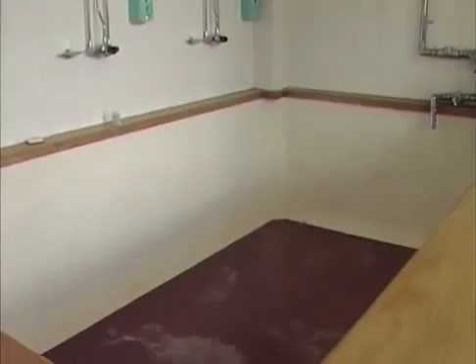So they wanted a new stadium with a greater capacity, up to 60,000, and the best corporate facilities possible. As a club, they had a reputation for doing things properly. The Highbury ground was quite an iconic football ground, and they wanted a world-class stadium. To remain one of the acknowledged top 4 in the English Premiership, a significant increase in size was required, and the club were not just looking at increased revenue from ticket sales. A larger stadium could mean increasing sales across many different revenue streams.

Well, we had a very open brief. The club hadn't really attempted anything like this before, so they weren't dictating any particular method of working or role or brief for us. We formed a steering group with about 7 or 8 of the key people, consultants and clients involved with the job from pretty much the outset in March, April of 2000. We managed that group, and that really was the springboard for how the project started.

A major issue for the board of directors was to gain acceptance from the fans for a move from a much-loved home. This would be greatly helped by keeping Arsenal in North London. Not an easy task, finding enough land to host the footprint of a massive new stadium and the associated increase in traffic to and fro.

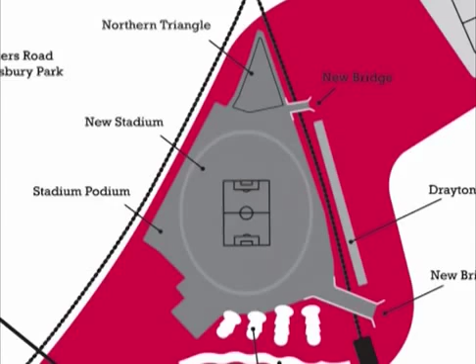Amazingly, the Arsenal directors managed to find a site only a few hundred yards from Highbury, but it was far from deserted. We very quickly realised that the project was broken into 3 fundamental parts: a new stadium, a relocation site at Lough Road where we would have to provide a lot of the facilities that were on the Ashburton Grove site, and then the final phase was Highbury Square.

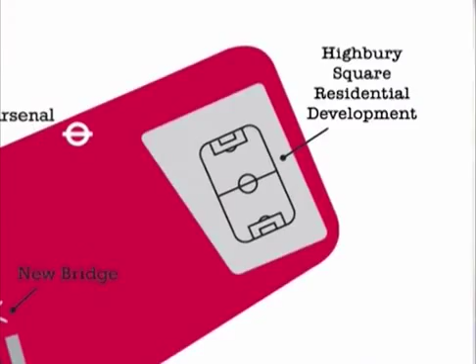Ashburton Grove is roughly a triangle. To the west and the east are mainline railway lines, and to the south a small industrial estate. In the centre lay a council-owned recycling unit, and this would need to be resited at cost to the club, as would the acquiring of the industrial units.

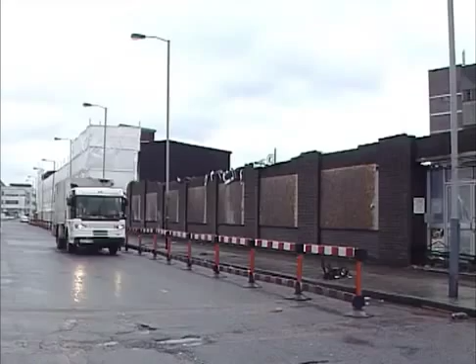And the rest of the project included the very substantial relocations of the North London Waste Authority's waste transfer station, the council's depot, their building maintenance department, and then there were a myriad of other occupiers on the site who all had to be relocated and their site purchased, or just a straight site purchase. That actually became the major focus of the first 3 years of the project.

The entirety of the site included land beyond the boundaries of the railway lines and beyond the Southern Road. Whilst this extra land could all be used, the stadium footprint would have to be within those boundaries.

A key decision was taken to appoint a builder during the design process, not always the case in such projects, and a decision which in retrospect was fundamental to the outstanding success of the project.

Well, we had a very interesting shortlisting. We started with about 6 companies who we thought might be capable of building the new stadium. Really at interview, 2 or 3 of those companies didn't really fit the bill. And then McAlpine were the most memorable, really. At interview, Rolf Christensen very much came across as somebody who wasn't in any way or shape concerned about the magnitude of the project, wasn't overwhelmed by the project, and was very confident, and even relished the deadline nature of building stadiums and having them open for the beginning of football seasons.

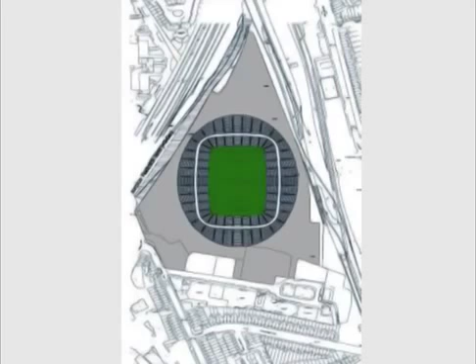An obvious but crucial design decision was choosing the distinctive shape of the stadium. A more conventional rectangular design was discounted, as it was too wasteful of much needed land, and in the end it came down to simple geometry, in that the elliptical shape fitted snugly into the triangular nature of the site, squeezing every inch from the available space.

And we were all new to it, so we all sat down and discussed every part of it, what was required, and they had traveled around at stadiums all over Europe, perhaps the world, and they had an idea what they wanted.

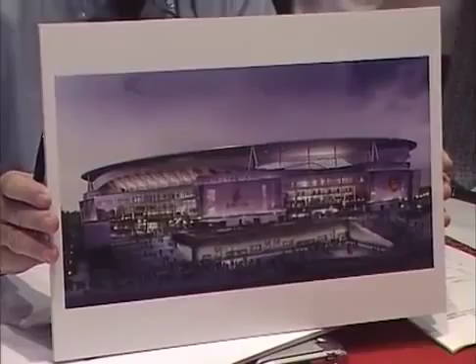We all worked very hard to get what they wanted for us onto paper and get the engineering right, and that was a real challenge. The 6 months we spent on pre-construction, without it I think we would have had a few problems, and we avoided them. The construction went like clockwork, and we completed it within time, even handing it over earlier, so it went well.

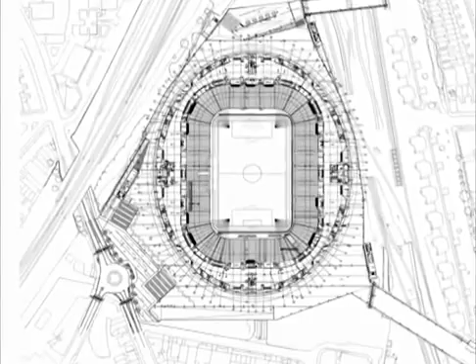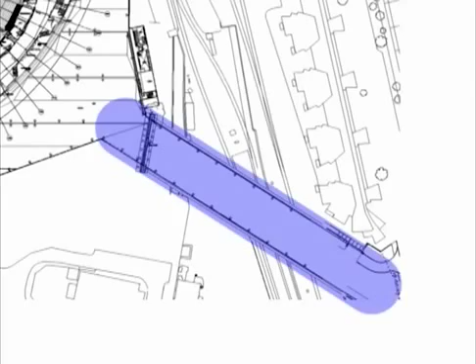To gain planning consent, the club would need to demonstrate that 60,000 fans could come and go to the ground with as little negative impact to the local community as possible, preferably using public transport. Two massive bridges were designed on the east of the site spanning the railway line, taking fans to both underground and above ground stations. Another obstacle was the recycling unit at the site's very centre.

This would have to remain in operation through the early part of the build, whilst a new unit in Lough Road was constructed. Positives to the community were needed, in addition to a new recycling unit, and it was determined that the stadium would generate much more than simply a new football ground. Areas within the site would contain affordable housing and give companies on the industrial estate the chance of resettling into new premises.

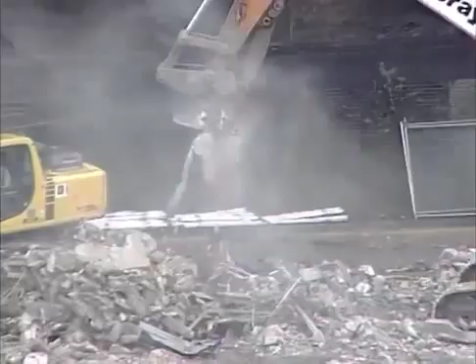What was known at this stage as simply Ashburton Grove would be a much needed and major regeneration of the area. With designs finalised and consents gained, some 2,500 signed documents later saw demolition teams move into Ashburton Grove in February 2003, and McAlpine's site teams settling into their new offices. Again, having designers, engineers and management on site was an important ingredient in the project's success.

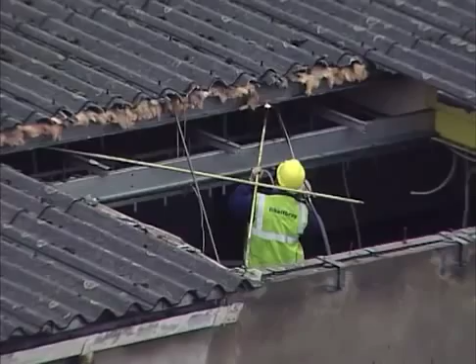Just as things were starting to happen, it all ground to a halt. It was about the end of March 2003. We'd been through, without doubt, the toughest year on the project, going through all the contract negotiations with McAlpine and the funding with the banks. We finally had virtually every one of our ducks in a row.

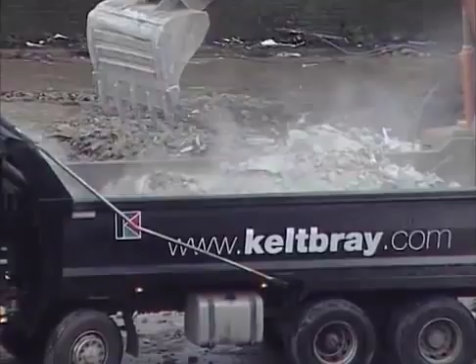Both myself and the client separately went off on holiday at the end of March. When I got back a week or so later, I went in to see him, and he gently dropped the bombshell that one of the banks had pulled out and that the funding wasn't now possible for the stadium. Work stopped and the site was mothballed, though Sir Robert McAlpine used this pause in construction to continue design development and progress the Lough Road Waste and Recycling Centre.

Today is an historic day in the life of Arsenal Football Club. I'm delighted to be able to announce that the funding has been secured for our new stadium project.

By the time the funding came in, that was 4 years on the project, and I think everyone had put so much into it by then that the thought of it not proceeding was awful. So there were some pretty major celebrations at the end of February when the banks finally signed up.

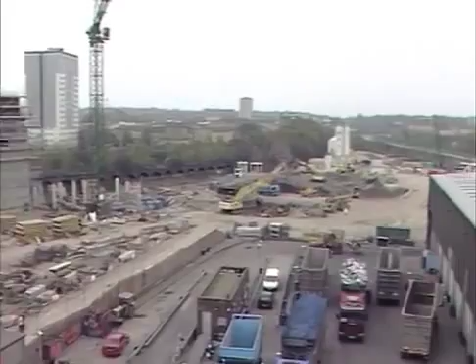With the funding now in place, McAlpines resumed work immediately and with some haste. If milestones along the critical path were not met at this early stage, it might have significant impact later in the project. Railway possessions and such like had been booked well before the hiccup in the funding. If the Arsenal board hadn't funded the continued fabrication of the bridge components, and if it wasn't for the speed in which McAlpines resumed construction, there could well have been delays.

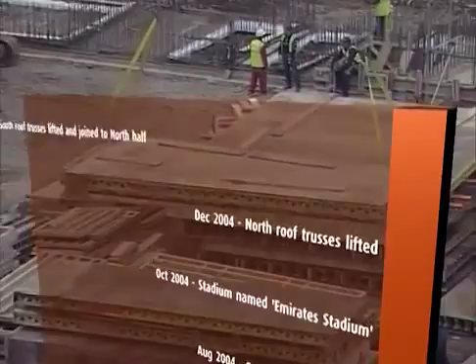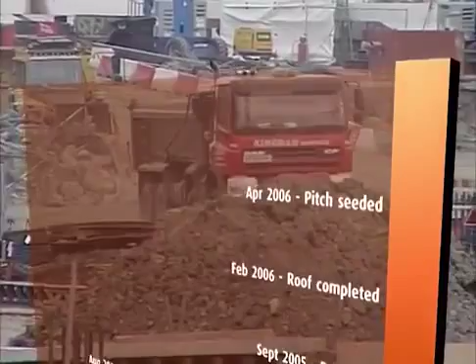Within a matter of weeks, the stadium started to take shape, and the practicalities of the construction programming became evident, with one end of the stadium apparently racing ahead. Of course, this was far from the case. Crucially, the bridge's construction had to be on time. Their assembly site actually fell into the path of the stadium, so they needed to be built and moved into place so as not to delay construction to the south end of the stadium.

Because of the constrained nature of the site, the construction programme was to commence the northern parts of the stadium first, leaving space for the bridge construction and the continued use of the recycling unit, afterwards programming the construction of the lower terracing in the south stand to create enough space for the roof truss assembly. Any delay to either the bridges or the roof would delay the fundamental stadium structure.

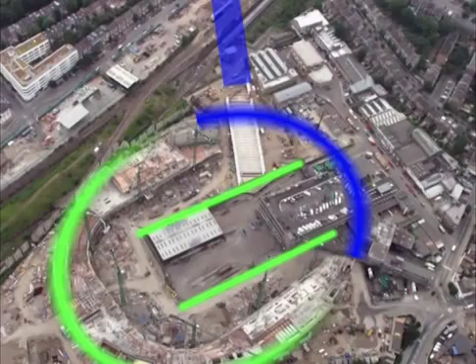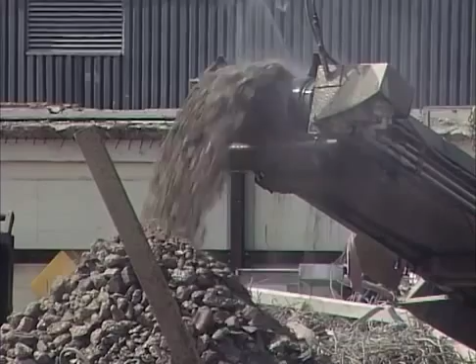We were knocking the buildings down as they were being vacated, or in the first instance having the services isolated. Building vacated, demolish, remediation and then piling, and subsequently following on as closely as we could behind the piling with the substructure. So you have a fine balance all the time in terms of trying to do one operation as close as you can to the next without losing efficiency in one or other of the operations.

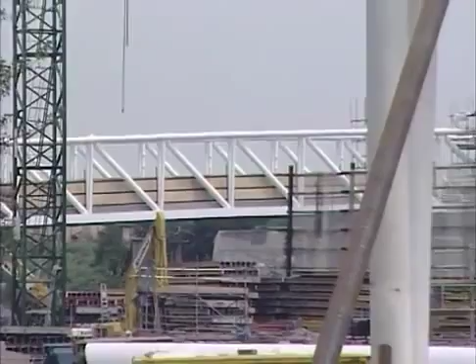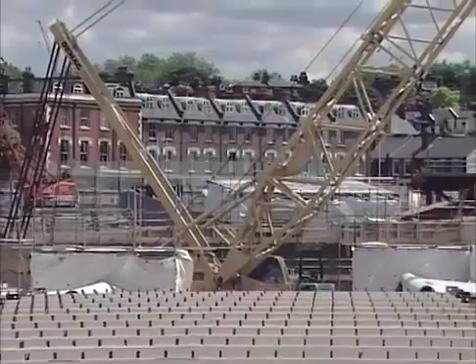Because of the unusual nature of the site, roughly a triangle surrounded by railway lines on two sides, one of the key aspects of the design were for two bridges to be constructed on the northeast and southeast of the site. To get the crowd away, we built two bridges across the railway line, and they are massive bridges. One is 26 metres wide and the other is 18 metres wide. It is two massive bridges just to take the crowd and spread the crowd.

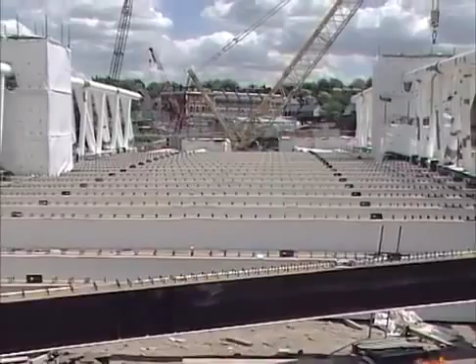There had been a few disasters with football stadiums and crowds, and all this was taken into consideration in the design, so people can escape all over the place. Because the stadium structure would fill a huge percentage of the total site available, elements of these bridges would need to be built and completed before the stadium structure was in place.

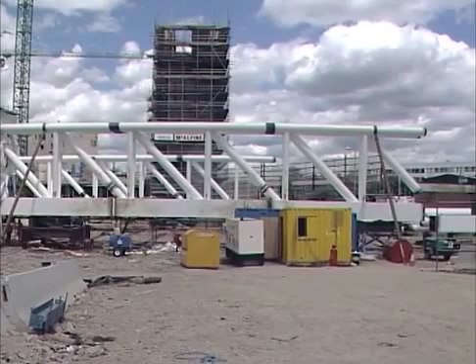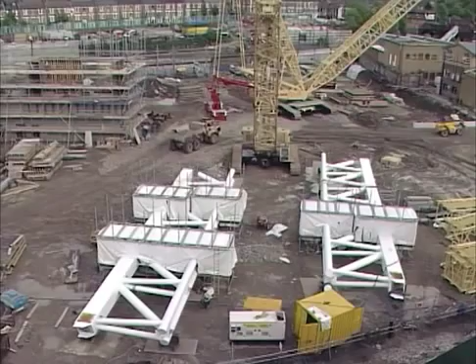The other intricacy with the site was the extent of the works we had to build that weren't necessarily related to the arena. The two bridges are good examples of this - they were assembled in the plan of the stadium and thereby occupied space that we needed to free up to build the stands.

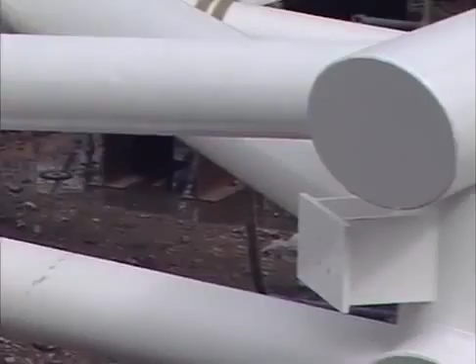The South Bridge in particular sat in the middle of the southwest of the stadium and was built as a whole 100-metre section bridge and then slid across. Until that bridge was located over the railway line and slid into place, that section of the stadium couldn't be built. The same went for the North Bridge up in the northeast corner, whereby elements were built on the site of the stadium and needed to be positioned, with dependency on getting rail track possessions to install the bridge.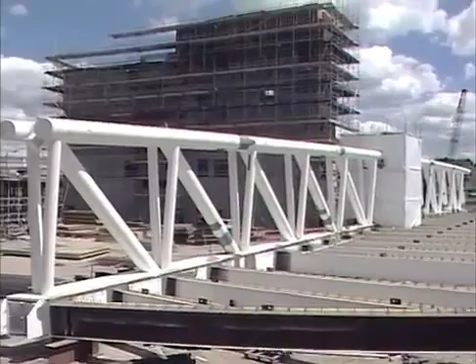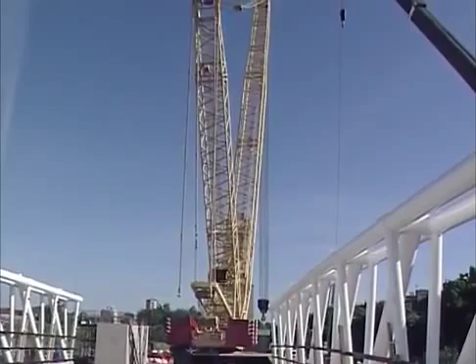So there were quite high levels of risk in terms of third-party approvals, and the consequence of not getting the bridge in place was a critical path delay in the stadium. The North Bridge was the first to be completed and was built on site from pre-produced sections. The construction team always knew that their positioning on time would be critical to the completion date, and when the funding hiccup in 2003 took place, the good relationship between constructor and client proved crucial.

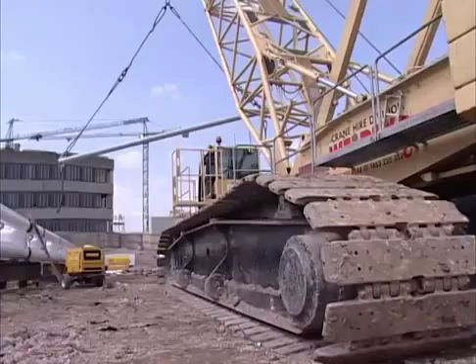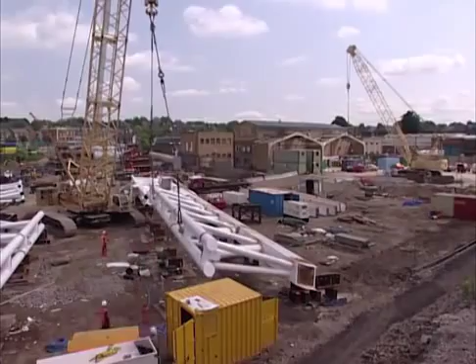We booked that possession 38 weeks prior with Railtrack, so that weekend it had to be ready. To give an example of how committed Arsenal were - that was on the critical path, and then construction was stopped in April 2003 because they didn't get the funding, and it was a long lead-in for material. Arsenal, with their own money, funded the procurement, all the material, the steel, and also the fabrication.

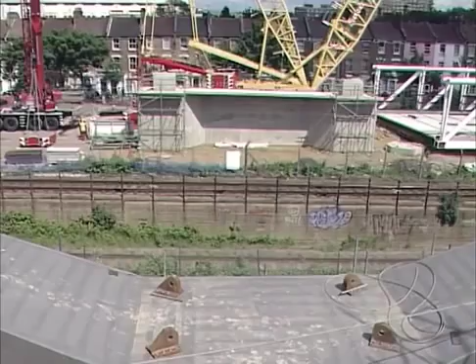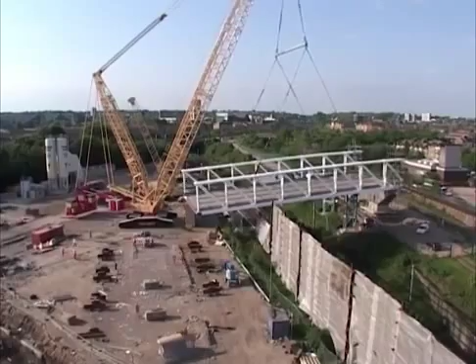So when they got the funding on the 1st of April, we were ready to go, and we managed to get it across in, I don't know, 16 hours, 15 hours, in the middle of August. That was critical because we couldn't construct the east stand without it. It was an achievement, everybody pulled together, and it worked out great. With roads and railway lines closed, the North Bridge was ready to be lifted. Built in two halves of 180 tonnes each, each section was eased into place by massive 750-tonne cranes over two weekend possessions. The second, the South Bridge, was a different animal.

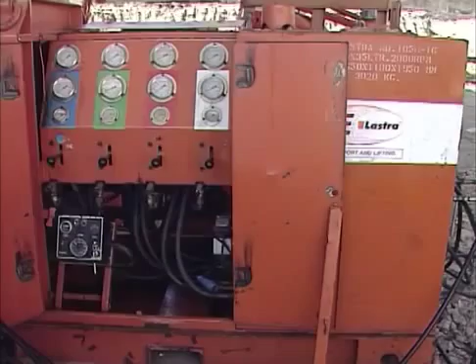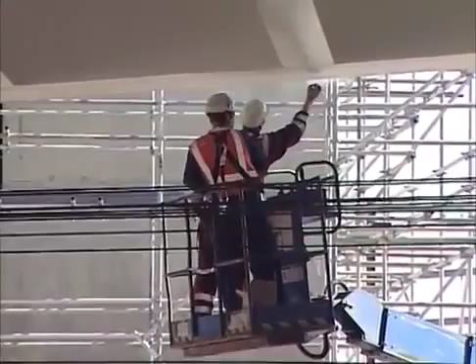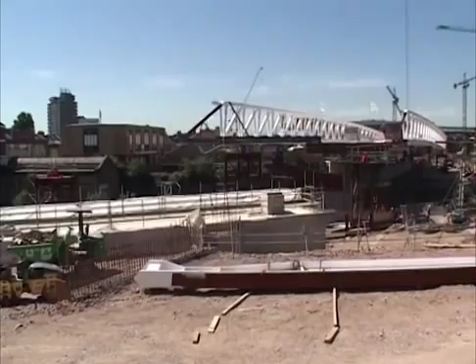It is 100 metres long and weighed 1,000 tonnes, and we basically couldn't get a big enough crane to lift it across. So we had to build it inside the stadium, inside the east stand, and then slide it across. A Dutch specialist contractor oversaw this amazing technical operation. A heavily greased 1,000-tonne bridge was gently but steadily dragged across Drayton Park Station with amazing precision. The bridge's completion and its moving away from the actual stadium structure allowed the southeastern section of the stadium to be commenced, and a major milestone on the critical path was completed on time.

With the bridges in place and away from the stadium area, attention turned to the closing of the recycling unit. Away from the glare of publicity that Ashburton Grove was creating, across town in Lough Road, the landscape had changed, and the new recycling unit was completed and opened. Built in isolation, this would have been considered a major project in any local community, and was a tangible sign to the local population of the benefits the new stadium would bring.

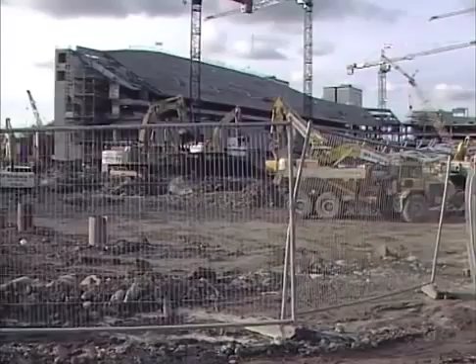Now that demolition of the waste unit could commence, work could begin on the two southernmost cores, and the area that would become a world-class football pitch could be cleared and levelled.

On the 5th of October 2004, the Arsenal directors made another important announcement. Construction of our new stadium has progressed at a fantastic rate, thanks to the great work by our stadium constructors, Sir Robert McAlpine. With the opening of our stadium in summer 2006 quickly approaching, we're delighted today to be announcing a significant partnership which will lead us into this new chapter in the history of Arsenal. This relationship is for both a naming rights partner for the new stadium and also a club sponsorship agreement, representing the biggest ever financial sponsorship deal in English football. So it is my honour to announce the beginning of the partnership between Arsenal Football Club and Emirates.

Ashburton Grove was now to be known as the Emirates Stadium. A major sponsorship deal had been signed, and any financial worries for the board started to seem a lifetime away.

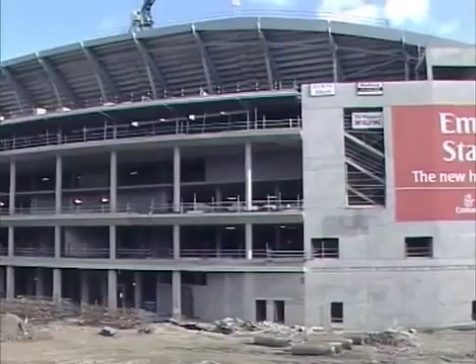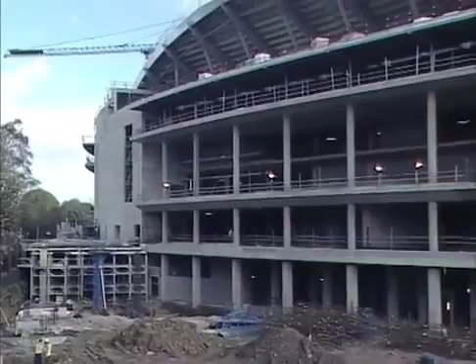The other aspect of the stadium is that on the 7 hectare footprint, the stadium covered the whole area - there was no spare land left at all. And you consider there are 600, 700, or 800 car parking spaces below, which helps everybody. It's quite unusual that within a stadium you have the parking facilities. The stadium has a raised podium, so everything at ground level is either car parking, changing rooms, kitchen, storeroom, and maintenance room. But all that had to be squeezed into the footprint on this triangle we had at the stadium.

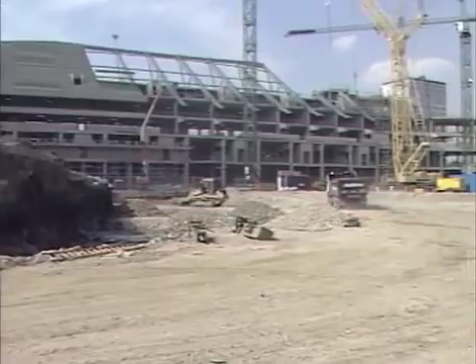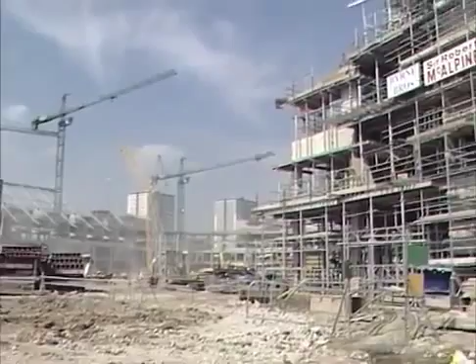The northern end of the stadium raced on ahead of the southern end, until both bridges and recycling units had moved. Then the southern cores could be built, but leaving out the southern prefabricated terracing units to allow space for the roof trusses to be swung into position. Only once the roof trusses were in position could the full stadium continue on to completion.

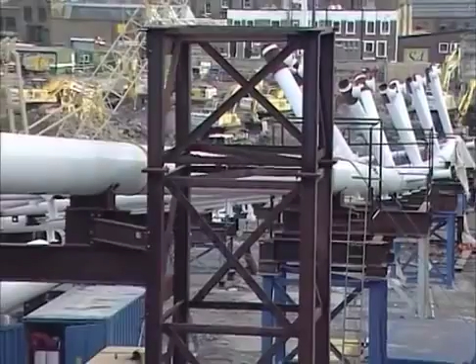The roof trusses had to be built in the same way as the bridges. Prefabricated components were shipped onto site, joined together in the future pitch area, and then hoisted into position and bolted together. The roof was a real challenge.

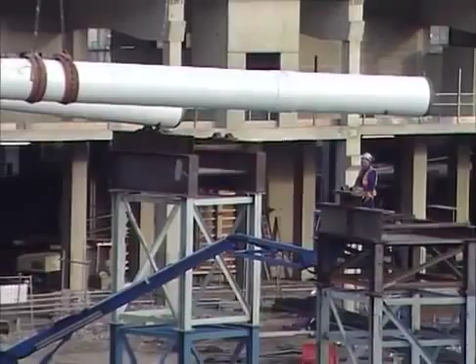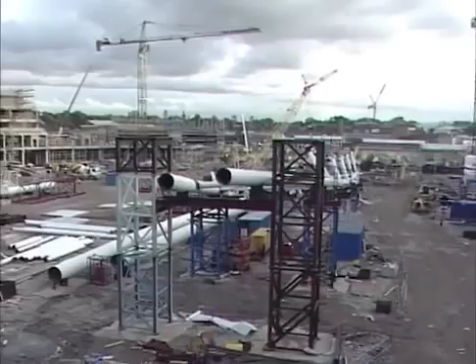Historically, stadiums have had problems with the roof. We spent a lot of time together with Watson - their engineering is very, very good, and they are tubular specialists, and we have used them previously. We also spent a lot of time with the structural engineer, Buro Happold. We went through how we were going to fabricate it and how we were going to erect it, and we simplified it. It was decided originally we were going to lift it in one piece - this 220 meter long steel truss, 800 tons - but then we decided to lift it in two and prop it.

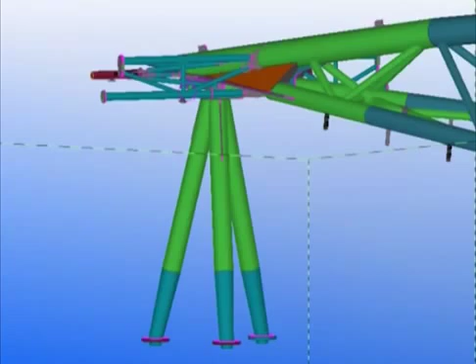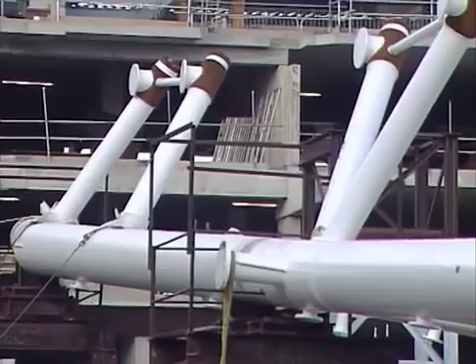With this X model design they used, that meant every piece of steel went up fitted - it didn't have to be taken down or remade. This X model in the design was definitely a huge help for us, and it worked out well. We were able to erect the roof steelwork in 6 months, including all secondary steel. We fitted the secondary steelwork at site level, so it went up already fitted, which reduced the program and also reduced the health and safety risk for people working up in the air. It was all bolted together - there was no welding up at the top - and it went well.

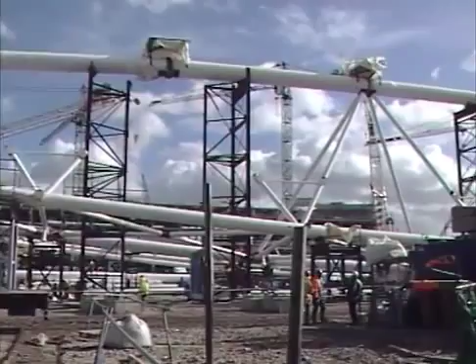The obvious example would be the roof, in terms of identifying how we were going to erect the primary and secondary trusses, given that the trusses were longer than the space available to sit them down in the middle of the pitch. To try and assemble a complete truss on the ground inside the stadium would mean that elements of that steel truss were sticking into the reinforced concrete structure, thereby fragmenting the ellipse.

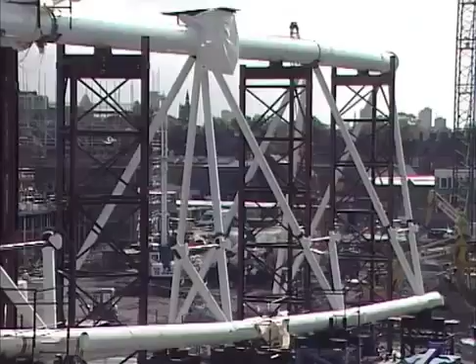So a very early objective we set was trying to enable us to build a continuous ellipse, albeit with the lower tier front and lower tier let down. But by having a complete ellipse, it then allowed us to set commissioning zones and installation zones for the services and the fit out.

Even with the programmed completion of the lower southern terracing, there simply wasn't enough space within the stadium pitch area to build the entire roof structure in one go.

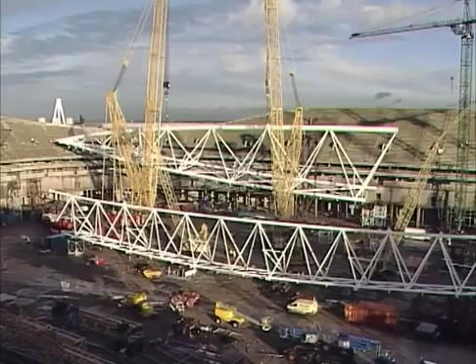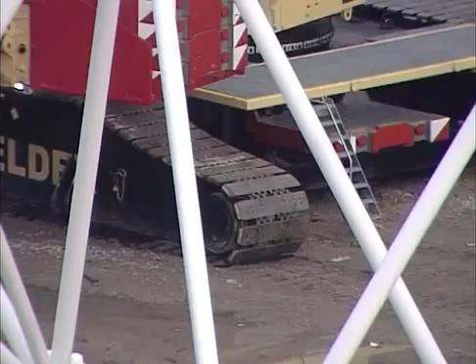The northern end was built first and lifted in December 2004. Then the southern end was built and lifted in the following April. The cranes were back. The sections were lifted onto 4 gigantic tripods in each corner of the stadium and supported at the midpoint on temporary trestles.

The installation of the roof trusses freed up commencement of the lower terraces, particularly in the west stand, where all the players' change areas, referee change and so on were located. There were quite a lot of rooms beneath those lower terraces with all the associated services, plumbing, showering and so on. It was critical to get out of the way to complete the frame.

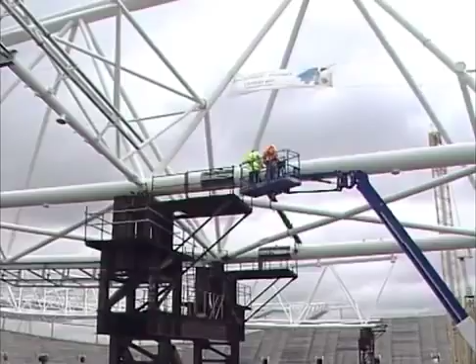Finally, when all was in place, Arsenal director Danny Fiszman was lifted into position to place the ceremonial bolt joining the two roof halves together. With the roof trusses now in place, the future pitch was now clear and the race for completion was on.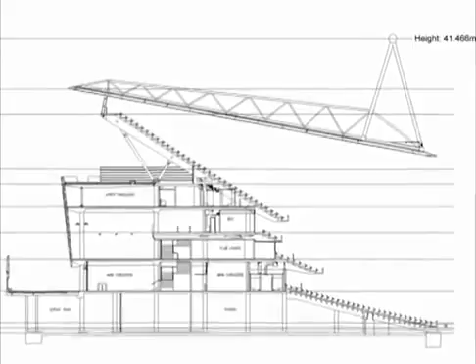The inward sloping nature of the roof presented a number of challenges in terms of removing water from the internal perimeter and allowing sufficient sunlight onto the pitch, to prevent the problems other stadiums had of reduced sunlight affecting their playing surfaces.

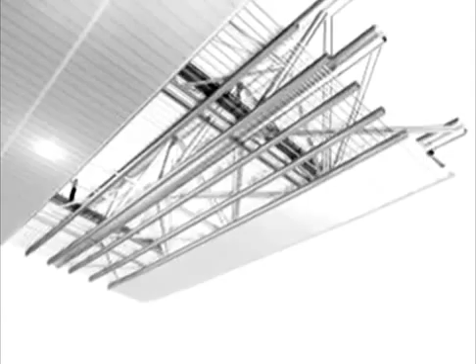The roof is all in one piece and moves around with temperature and wind, and moves quite a lot. Therefore the glazing that fits between the roof and the top of the concrete stands, which is glass in steel frames, has to articulate quite significantly to accommodate that movement. So it not only leans, but it leans inwards and outwards and sideways both ways.

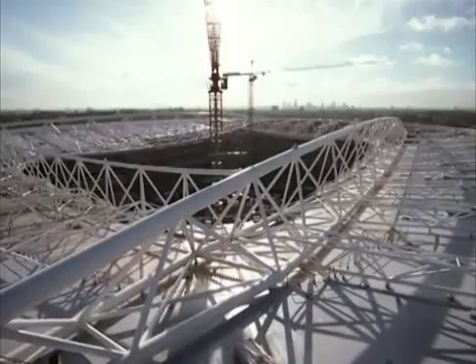Getting that to go up looking as if it was right, and having enough movement capability in it to accommodate the movement that's going to hit when winter comes or summer comes - and we had some hot temperatures in the summer and some cold temperatures in the winter - was interesting.

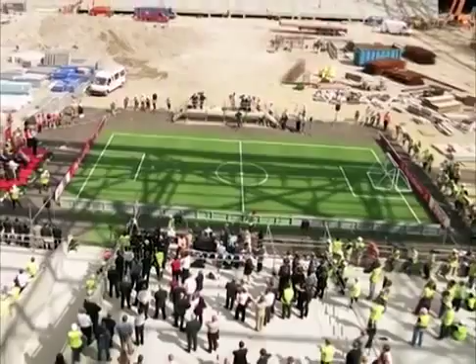The stadium structure was now complete, and another key milestone, the attainment of full height, was celebrated with a traditional topping out ceremony on the 15th of August 2005. A team of Arsenal directors played a team of Sir Robert McAlpine management and other project partners in the first game of football to be played at the Emirates Stadium.

The major structure was now complete, and the job of fitting out this enormous stadium was to begin. We've got 10 chillers with a capacity of about 5 megawatts of cooling capacity. We've got over 50 air handling units.

We've got about 40 catering establishments, whether it be kitchens - one large kitchen, a central processing unit - with about 16 kitchens and 20-odd catering establishments. So it's quite a large distribution system.

When the stadium was designed, and with the initial funding concerns, the interior of the stadium was designed as a basic fit - piping in toilets would be exposed and blockwork would be more visible. As more investors came on board, and with the Emirates sponsorship sealed, an upgrade in the fittings and fixtures was now possible. Then came a new challenge with the catering.

The catering man pulled out. It was a problem - they didn't have anyone to fit out the kitchen and the concessions. And they came in and said, what can you do? And together, we fitted out the kitchen and the concessions.

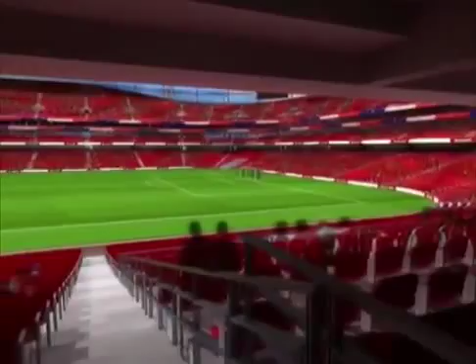Highbury was known to have had the best pitch in the Premier Division. The original design had a set of sight lines, but under UEFA conditions, which require a bigger advertising board, you lost sight lines on certain groups of seats. As the job progressed, we worked on changing the pitch levels to optimise sight lines relative to advertising boards.

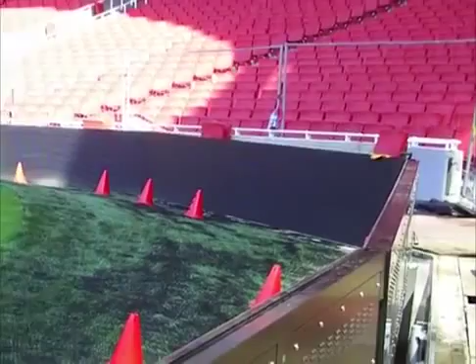As far as advertising boards were concerned, they introduced electronic boards as a fairly late change, housed in trenches around the edge of the pitch with significant servicing requirements. Even the pitch was subject to change and development, and this showed the level of achievement in hitting dates. We never fell behind schedule, so there was opportunity to carry out additional works and improve the design. The pitch, after 20-odd games, is in fantastic condition according to the Arsenal board.

With the top two sides in the Premiership going directly to the group stage of the Champions League, Arsenal were lagging behind the top two. This would require them to play a qualifying match in early August, and the contracted completion date was August the 1st. With ramp-up events needed prior to granting a safety certificate, the club had to ask McAlpines to try and finish early. It was vital that it was finished.

By working together in the last two months, they installed the IT and telephone lines, all the furniture was being installed, the kitchen was being commissioned. We did our commissioning, snagging and de-snagging, and suddenly, where we expected 400 or 500 people on site for the last month, it was 1,500 people on site.

On top of that, training was going on with all the stewards — Arsenal has about 1,000 stewards — happening at the same time. The catering people also trained 300 or 400 people, all in the last few weeks. The last 6 to 8 weeks were a little bit hectic, but everybody kept calm and worked together. If we hadn't had good team spirit and trust between ourselves, it could have been 2 or 3 months delay.

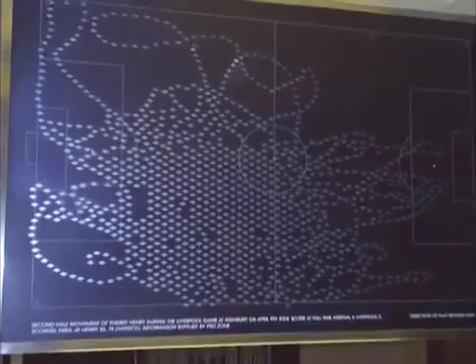We basically allowed them, prior to practical completion, to go in and do their training and commissioning. The reason was that we were all in the same boat with one objective: to complete it on time, or earlier.

In the climate of delays to the new Wembley project, the Emirates team set a completion date in July and a first match for the 22nd of July. It was to be Dennis Bergkamp's testimonial, Arsenal versus Ajax.

Seven to ten days after we got practical completion, they had 54,000 people in the stadium for the Bergkamp testimonial. Everything worked satisfactorily — getting spectators in and out, the IT, and so on. Afterwards the Arsenal directors said it was unbelievable: we had 54,000 in and no snags at all.

Seeing what 60,000 people look like is quite something to plan for, realizing there are between 600 and 1,000 trains on the tube involved. When you actually see 60,000 people in the stadium on the first day, you suddenly realize it's a whole new ball game. But for me, to see 54,000 people in and have it work — that was the acid test, and I think that's what I'll never forget.

I think it was a model project in that it was a fast project which we completed on time. We obviously completed it within budget, both of which are huge ticks in the box for any potential client, and they're not easy things to deliver.